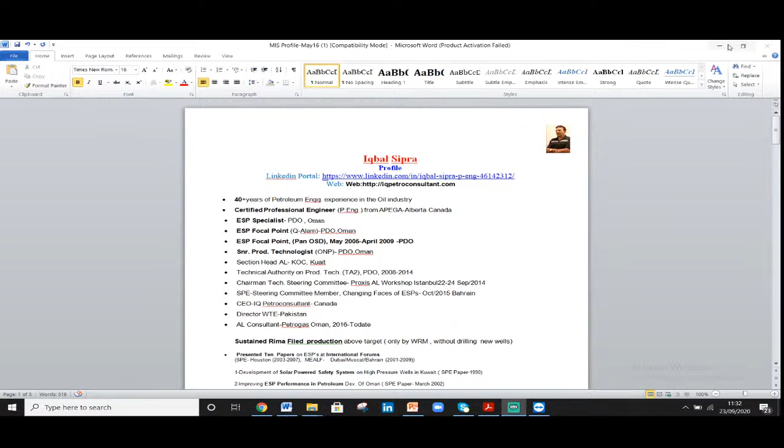Let's see what I'm going to talk about: artificial lift methods. Artificial lift basically means the means of flowing a well which is incapable of flowing by itself to the surface, by installing some pump or alternate devices. The concept is: if flowing bottom hole pressure is less than your static head pressure, the well will not flow. In this kind of situation, you may need artificial lift means to lift the well to surface.

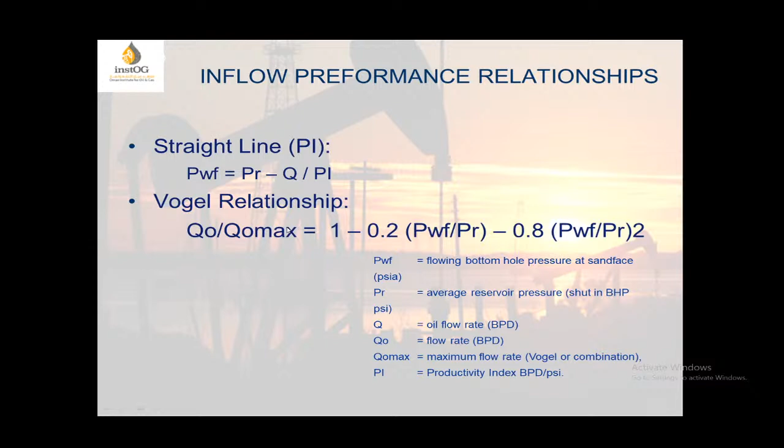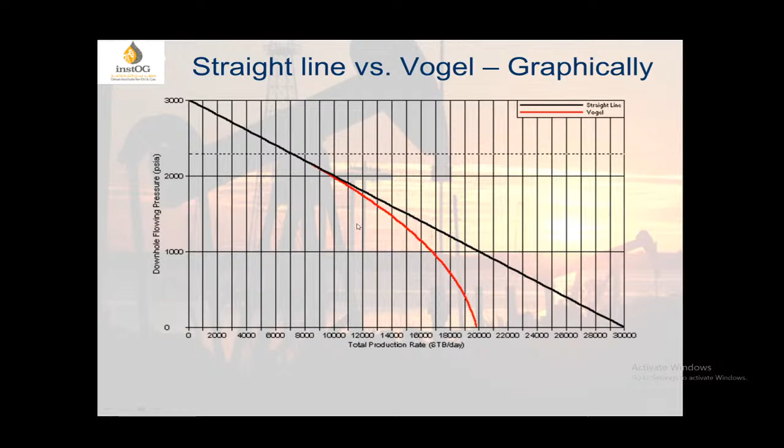So the concept is there are two ways: either the gas is in the solution or gas is broken out of the solution. If gas is in the solution, we still have a straight line correlation altogether. But in case it breaks out at the bubble point, then it deviates and departs from the straight line, so a different correlation applies. I don't want to go into mathematical details at this stage.

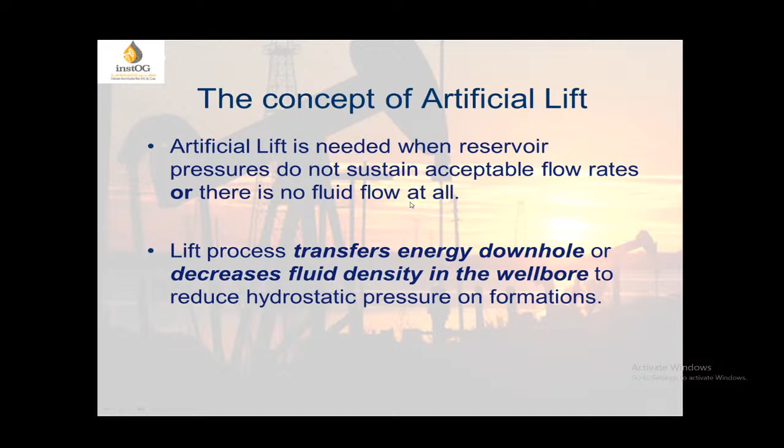Artificial lift is used when reservoir pressure does not sustain acceptable flow rates on the surface, or there's no fluid flow at all. The lift process transfers energy downhole or decreases fluid density in the wellbore to reduce the hydrostatic pressure on formations. So what are the artificial lift means commonly used in Oman also?

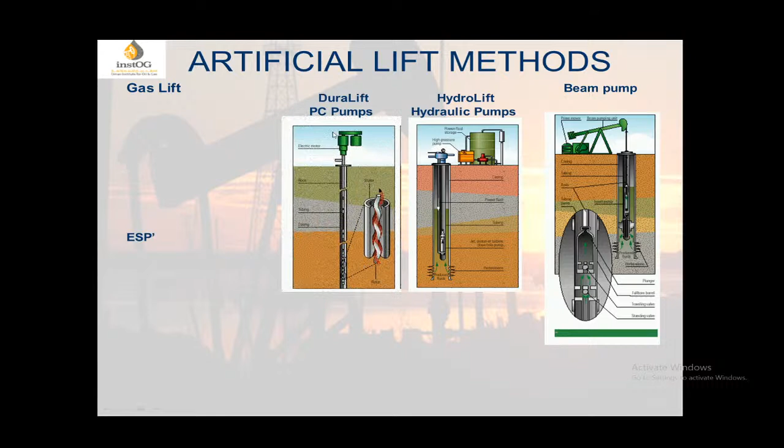First of all, the oldest method is the beam pump, then hydraulic pump, which is installed worldwide and also available in Oman, mostly in water wells. Beam pump is the most commonly used means of lifting in all areas, particularly in Oman. PCP is also installed and available in Oman. Gas lift goes to some areas also, and ESP is the most commonly used in Oman. I don't have exact figures, but the gut feeling is ESP produces 85% production worldwide, and it's almost the same percentage in Oman. Gas lift, PCP and hydraulic lift together are 15% of the rest of the application. The most numbers are beam pumps, but production-wise ESPs are commonly used for higher rates of production.

I should say about almost 1800 to 2000 ESPs are installed in Oman altogether, and PCPs range from 100 to 150. Gas lift is almost about 100 wells, and hydraulic pumps are very little, maybe 50 to 100, not commonly used in most areas.

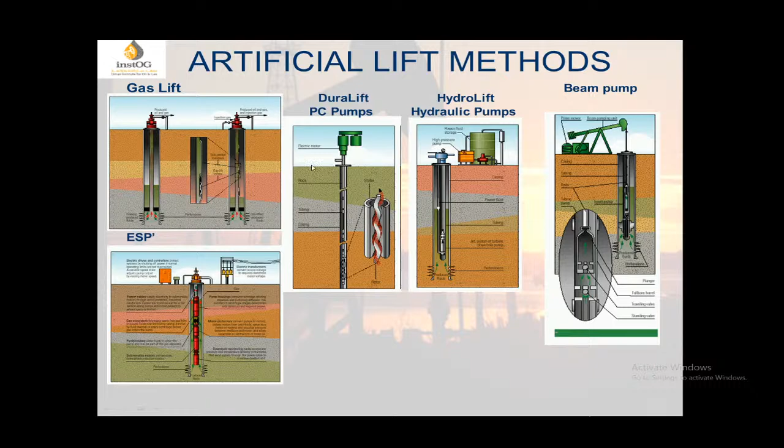Worldwide, 94% of wells are on artificial lift, and this is an old figure from 2004. You can see rod pumps are 79%, electric submersible pumps are 12% back in 2004. The figures have changed now, but I just want to give you a flavor and a picture. Gas lift is 3%, hydraulic pumping is 1%, and others 2%.

Production-wise and revenue-wise, rod pumps account for $717 million, and ESP is the most at $1725 million. PCP is $369 million, and hydraulic pumps are $30 million.

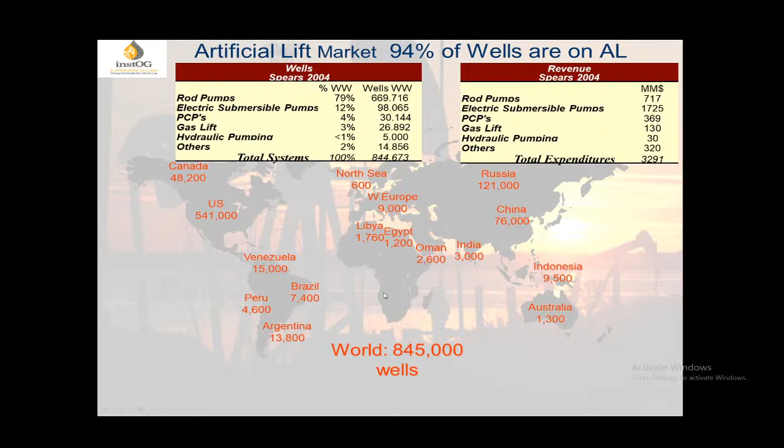You can see the most populations around the world: Canada 48,000, North Sea 600 - these figures are not applicable anymore, but just to give a flavor. Russia 121,000, 76,000 in China, Indonesia 9,500, 1,300 in Australia, 2,600 in Oman, maybe more and changing now. Libya, Venezuela, Peru, Brazil, Argentina also have significant numbers. The world total is 845,000 wells back in 2004. Now it's much more increased.

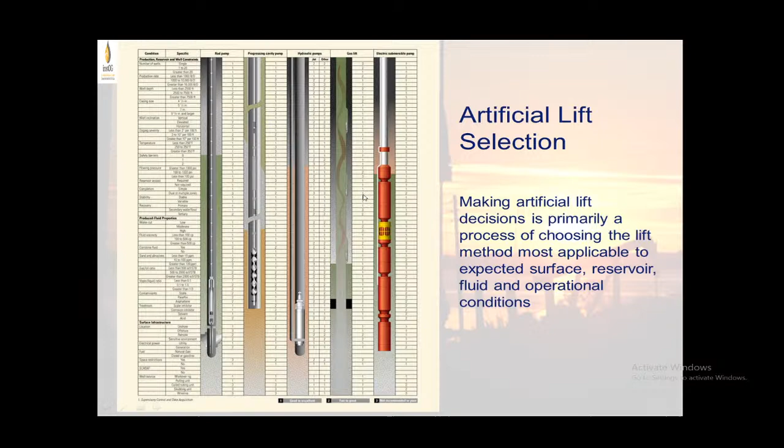These are the artificial lift selection methods. I don't want to go into detail on screen, but you can see there are different ways, installation depths, and ranges. So how do you select an artificial lift method? One size does not fit all.

If there's scale, gas lift is acceptable. If there's sand, gas lift is very good and hydraulic lift is very good. For paraffin, hydraulic lift is good, and ESP is good too. For corrosion, rod pump is best. For high GOR, gas lift is best, and ESP is fair to good. Nowadays high GOR ESPs are available - I've installed them myself, and in Oman I've gone up to 500 SCF per barrel.

Literally we can pump gas to the surface. For deviation, gas lift is very good, and ESP is good too. But for other wells, you should be constrained about vertical configuration.

Depth-wise, the best is hydraulic pump, then gas lift and ESP. Flexibility-wise, rod pump is more flexible, while gas lift and ESP are equally good. Temperature-wise, rod pump is the best, though ESP is also good nowadays - hotline ESPs can now be installed up to 200-250 degrees Centigrade.

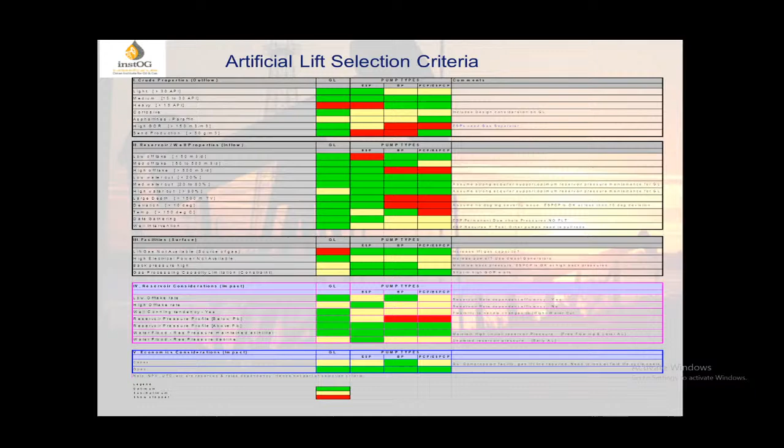They have been installed in the world. I have tried one in different areas of the world. So these are the artificial lift selection criteria in a nutshell. I don't want to go into detail, but this gives you a graphical picture.

Now we're coming back to the systems, one by one. I'm going to take you through all the systems one by one. Let's see what are the pros and cons of different concepts of artificial lifting.

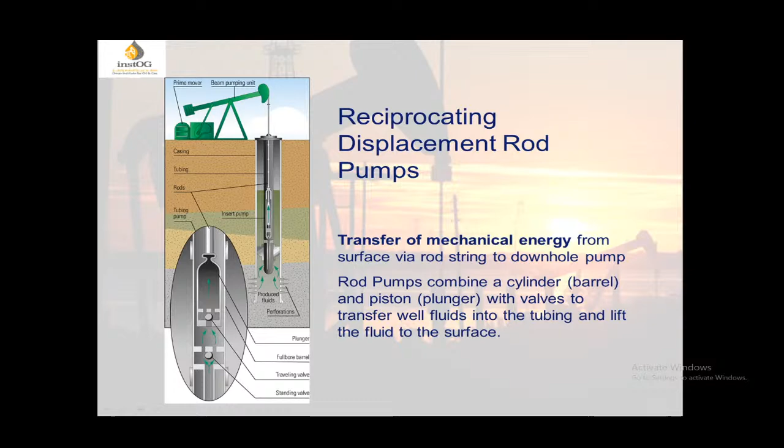Reciprocating displacement rod pump transfers mechanical energy from surface via rod string to downhole pumps. Rod pumps combine a cylinder and piston together, working on a to-and-fro motion. Advantages: most widely used artificial lift method, best understood by field personnel, low intervention cost, can be installed in remote locations without electricity, can run on gasoline or diesel, readily accommodates volume changes, and has reliable diagnostic tools.

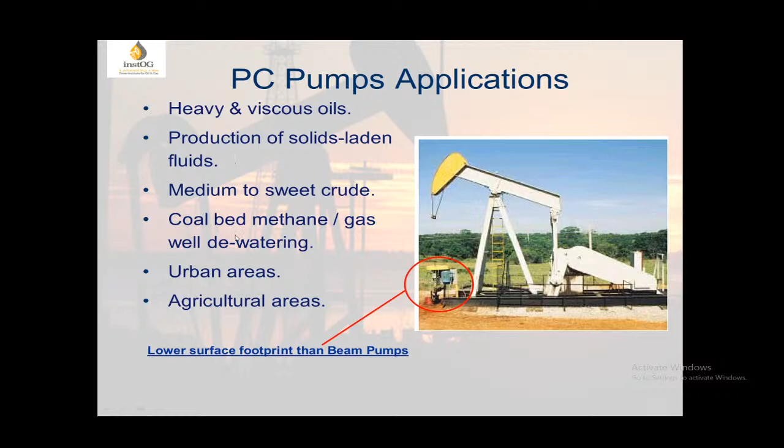So what are the applications? Heavy and viscous oils, production of solid-laden fluids, medium to sweet crude, coal bed methane / gas well de-watering - these can be installed in urban areas and agricultural areas.

Progressive cavity pump advantages: simple two-piece design, excellent for viscous crude, resistant to abrasives and solids, non-pulsating, does not gas lock or emulsify fluid, works on oil gravities from 5 to 42 degrees API, fairly flexible application method, and efficient power usage.

Disadvantages: sensitive to overpressure, sensitive to pump-off, restricted flow rates up to 5,000 barrels per day, with some exceptions but commonly around that figure, restricted setting depths, limited operating temperature, and not compatible with some chemicals.

Nowadays there are PC pumps available in the industry with metallic liners, and they can handle high temperatures.

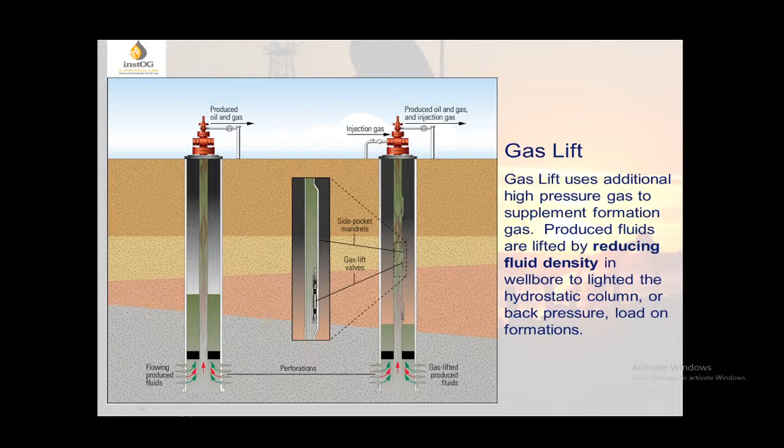Gas lift is the next application. It uses additional high pressure gas to supplement formation gas. Produced fluids are lifted by reducing fluid density, and by reducing fluid density, the flowing bottomhole pressure becomes greater than the static head pressure, causing flow to the surface.

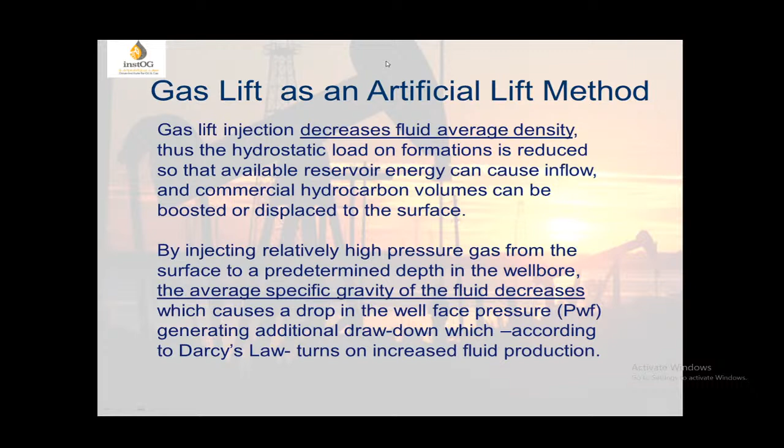Gas lift as an artificial lift method decreases the average fluid density, thus reducing the hydrostatic load on the formation. By injecting relatively high pressure gas from the surface to a predetermined depth in the wellbore, the average specific gravity of the fluid decreases, causing a drop in wellbore pressure. According to Darcy's law, this in turn increases fluid production.

This is another gas lift system configuration. You can see this is the tubing, with mandrels installed at different depths. Gas is injected from the surface through the annulus, and the fluid is produced through the tubing to the tank, where the gas is separated and then stored.

To clarify: gas is injected in the annulus all the way down, and the fluid is lifted in the tubing, going all the way to the gas separator. It separates the gas, and the fluid goes into the tank.

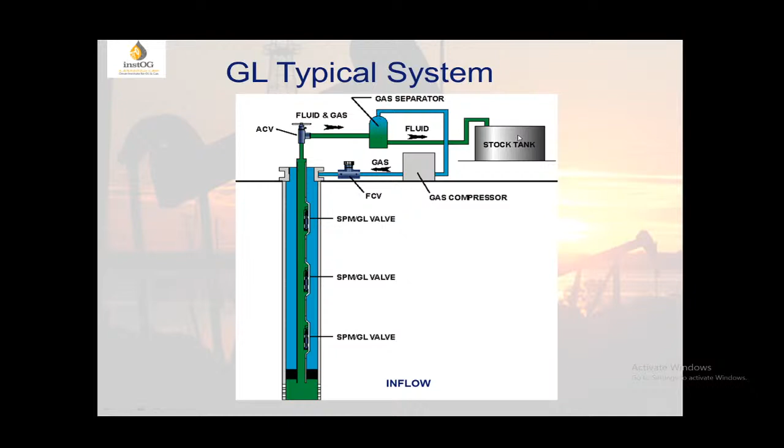These are gas lift system configurations. Advantages: fairly low operation cost, flexibility, can change rates by adjusting injection rates or pressure, and it's easy to change gas lift valves without pulling the tubing.

It's a high volume lift method, typically 35,000 barrels per day, and very good for sand and deviated wells. Disadvantages: must have a source of gas, and if gas is corrosive it will require treatment.

Possible high installation cost - initial cost is very high, but in the longer run the cost is much lesser. However, I have run a comparison during my working career in early stages, and found that gas lift is more expensive than other lift methods. If you compare gas lift and ESPs, gas lift becomes comparable only after 8 years of running. This is a very generic concept and cannot really be specified precisely.

In a nutshell, we can compare gas lift if it's available - it's easily used, and if gas is available, it's less costly. People can be trained on it very efficiently, and it's most commonly used. But now the industry trend is switching over from gas lift to ESPs or even PCPs, because of the cost of gas itself and the maintenance cost, it's no longer economically feasible. This is the common understanding.

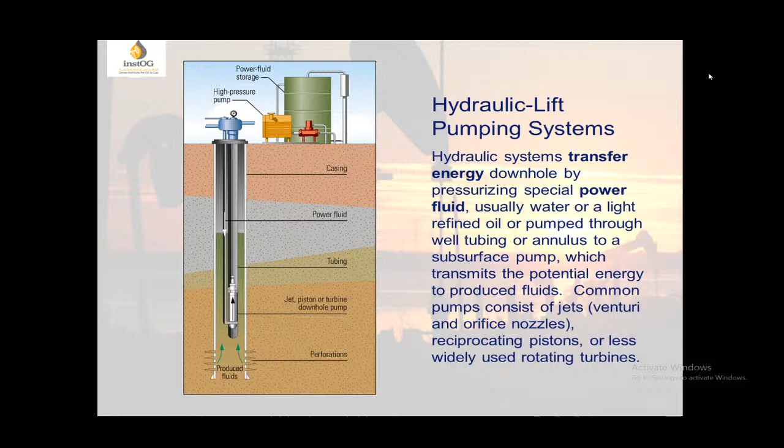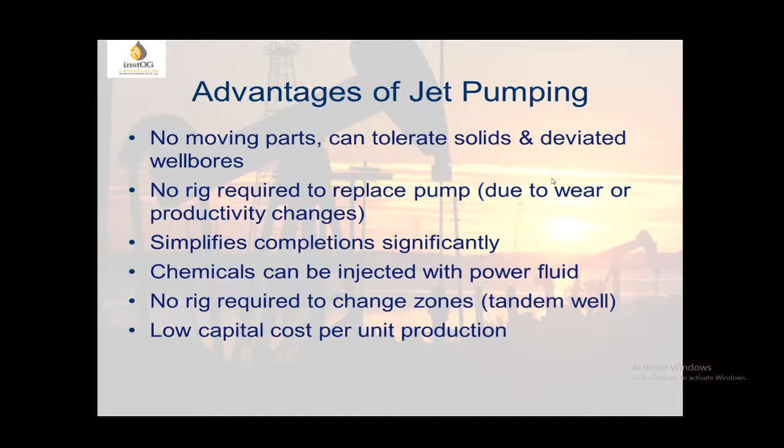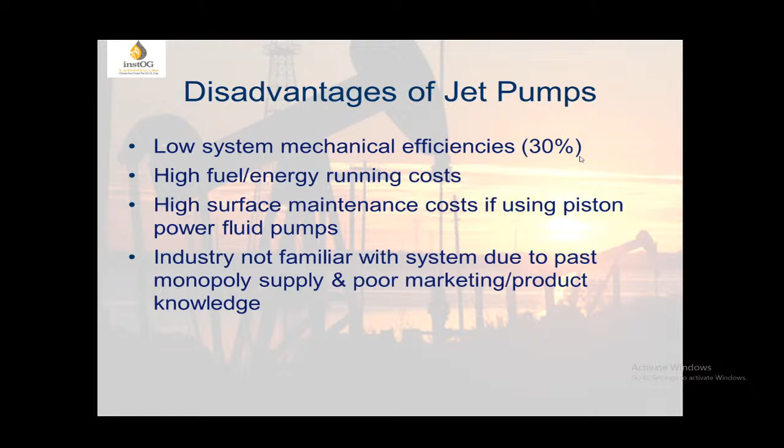Disadvantages of jet pumps: low system mechanical efficiencies, high fuel energy running costs, high surface maintenance costs, and the industry isn't familiar with the system due to past monopolies, supply issues, or poor marketing and product knowledge.

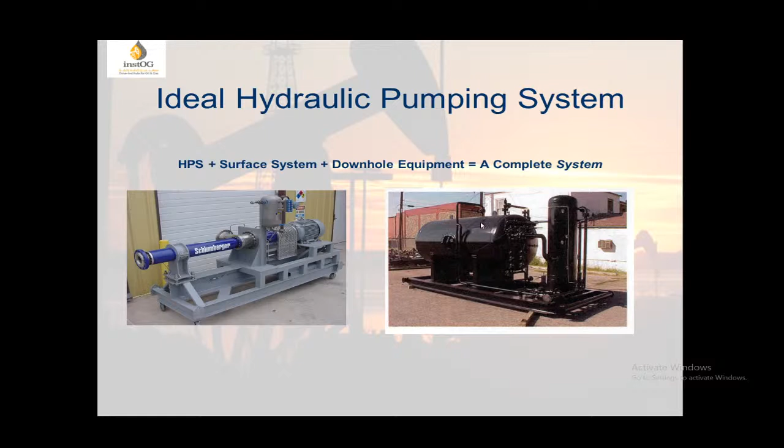Ideal hydraulic pumping system consists of this setup. You can see that HPS hydraulic pumping system, plus surface system, plus the downhole equipment, a complete system. This is your surface system, and this is separation system.

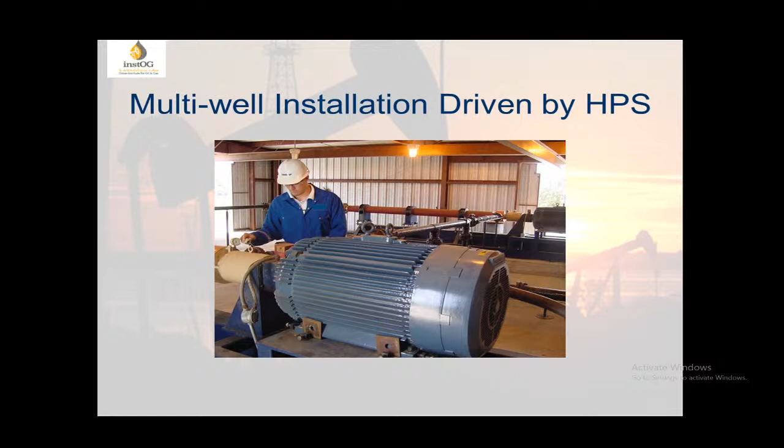A multi-well installation driven by hydraulic pumping system can also be done. You can see that this is connected to header and it can pump to multiple wells. And this is also portable testing units, available in the market.

Principle of operation: jet pumps can be used as an alternative to piston pumps. They can fit interchangeably into bottom assemblies, and a shorter bottom assembly can be used. Jet pump assemblies can be shorter and higher flow, referred to as a concept going back as far as 1852. First patents for oil well usage were in 1930.

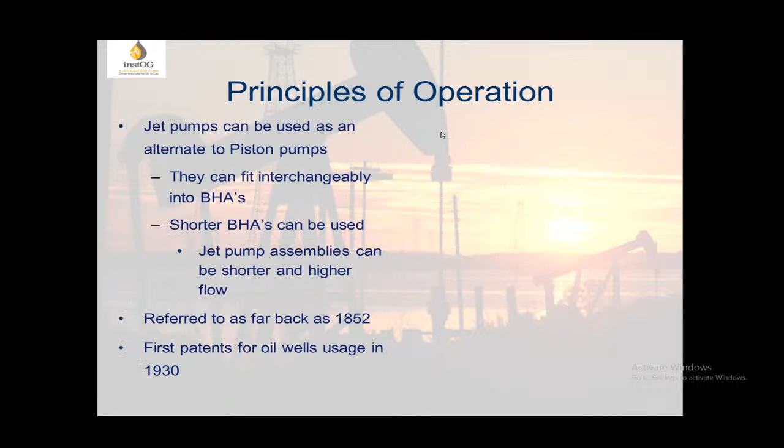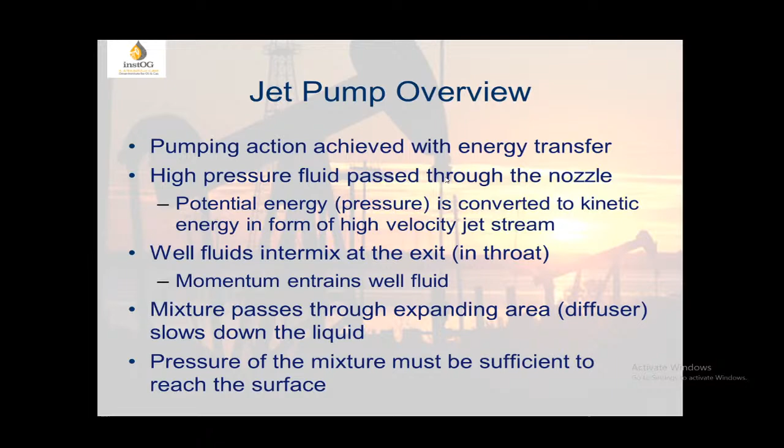Jet pump overview: pumping action is achieved with energy transfer. High pressure fluid passes through the nozzle, well fluid intermixes at the exit, and the mixture passes through the expanding area diffuser. Pressure of the mixture must be sufficient to reach the surface, so this is the concept of velocity head and pressure head together.

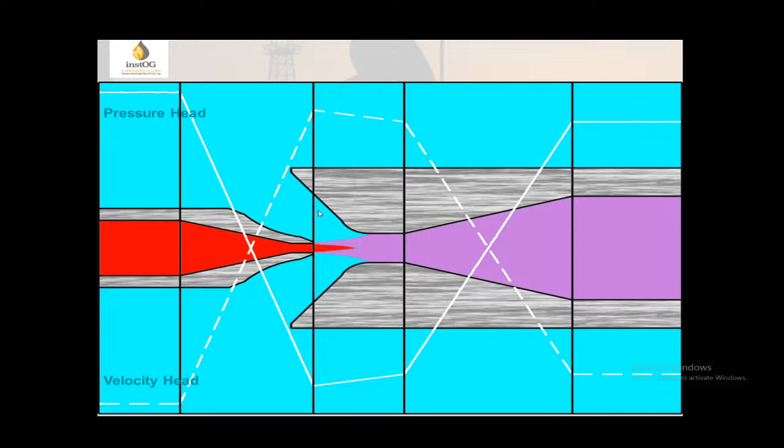You can see that it's a reciprocating system. When its pressure head increases, the velocity reduces. These are the nozzle and throat selection, you can see that picture.

No moving parts. Flow passages can use exotic materials or heavy oils, paraffin, gas, sand and corrosives. Reservoir needs a relatively stronger drive, with 100 psi per 1000 feet as the guideline.

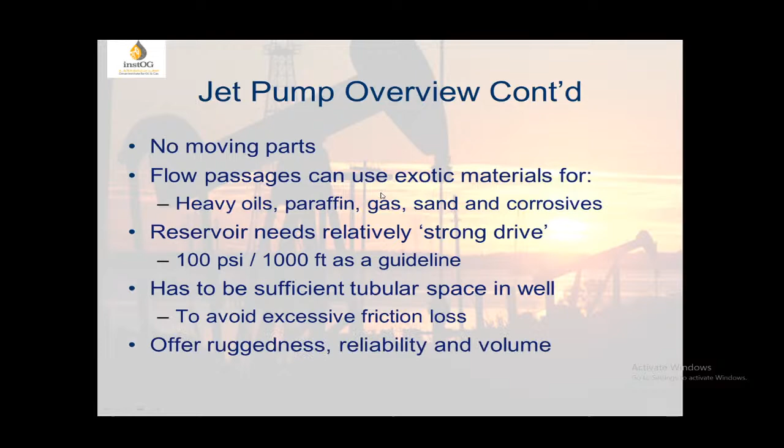And it offers ruggedness and reliability and volumes. Guidelines: PF pressure 2000 to 4000 psi, maximum well depth is 3000 to 12000 feet, production capacity is 15 to 10,000, and total length of jet pump section is 1.5 feet, very small.

Performance on nozzle throat area ranges from 20 to 60%. A different nozzle to throat combination provides a range of selection defining effectiveness of power fluid injection, power fluid to lift, and input horsepower. Higher lift, more pressure, more efficiency, up to 5,000 psi.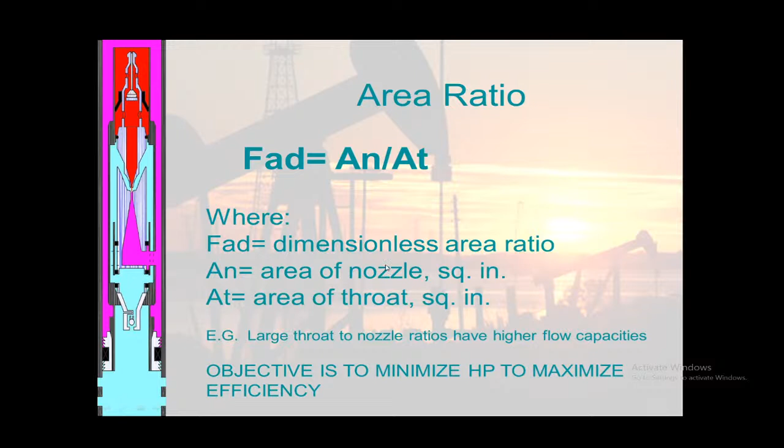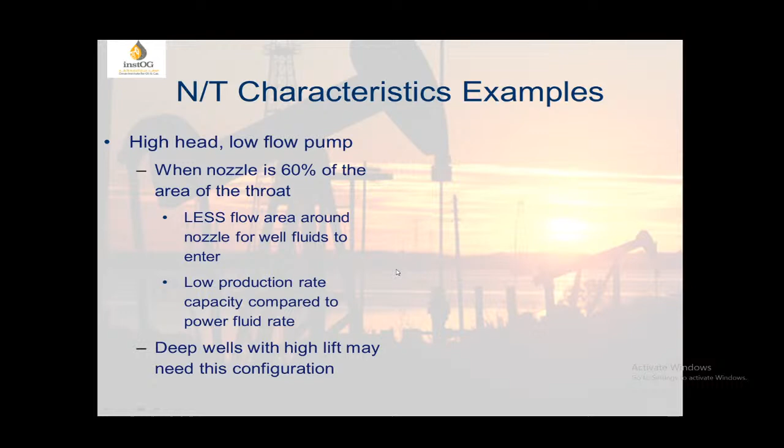High head, low flow pumps when nozzle is 60% of the area of the throat: less flow area around the nozzle, low production rate, and deep wells. Low head, high flow pumps is when nozzle is 20% of the area of the throat: more flow, high production rate, higher injection pressure.

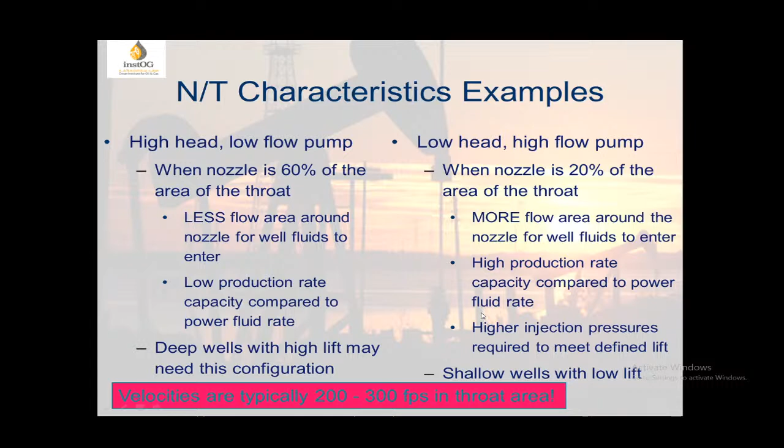And velocities are typically 200 to 300 feet per second in the throat area.

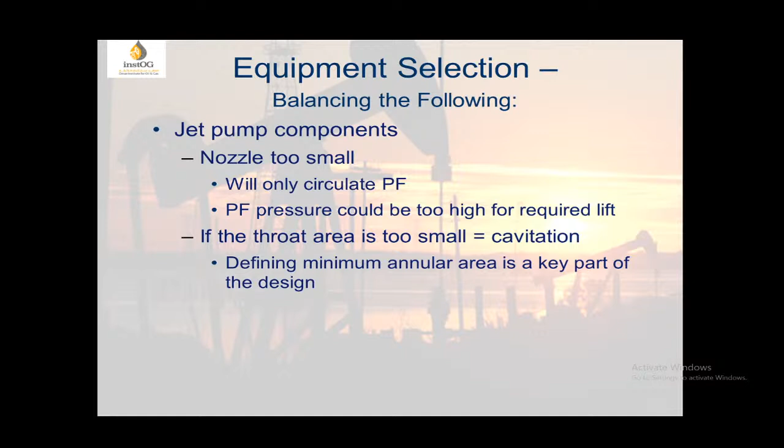Equipment selection balances the following: jet pump components with nozzle too small will only circulate power fluid. Power fluid pressure could be too high for required lift. If the throat area is too small, cavitation happens. Power fluid supplied goal is minimum high pressure and maximum production. Friction consideration is to keep losses to a minimum for applications.

So these are the concepts of application ranges. I don't want to go in detail, but you can see that 3.5 inches can go up to 15,000 feet and 10,000 barrels per day.

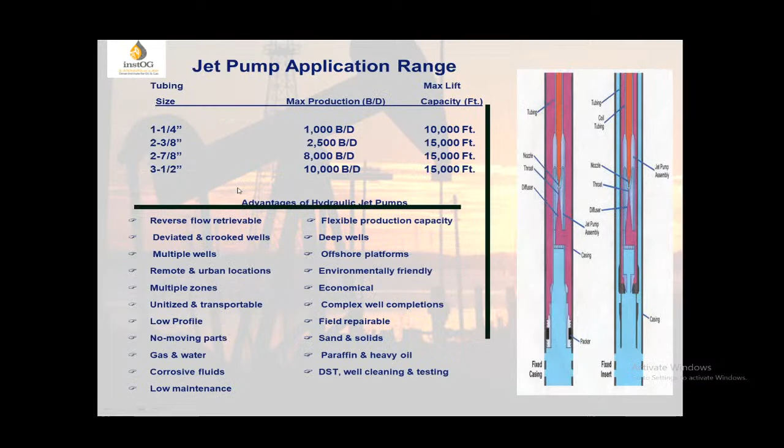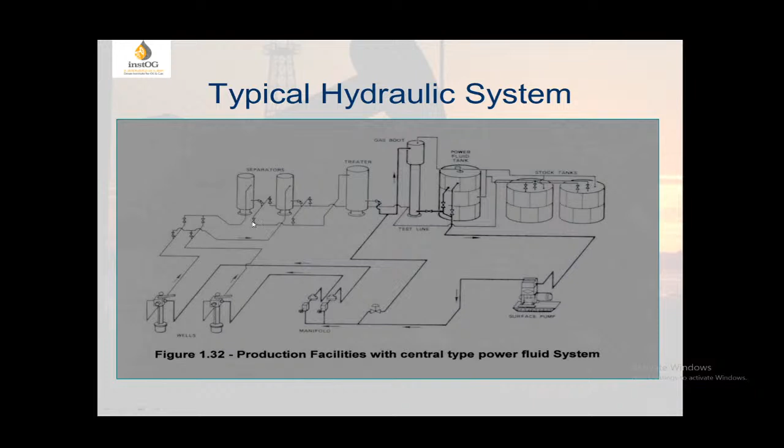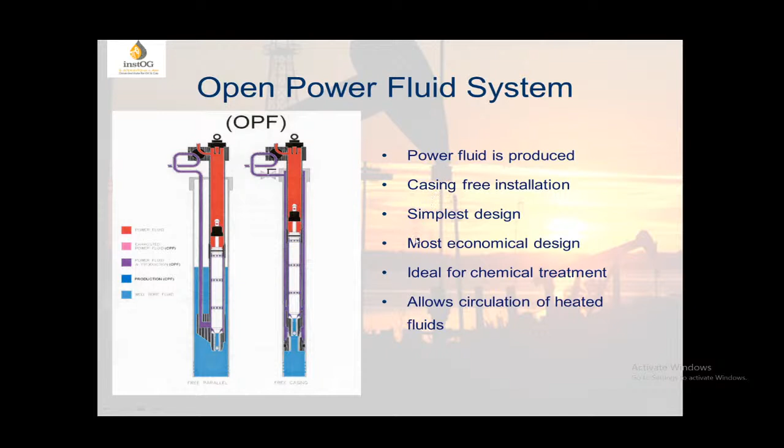So typical hydraulic pumping system, you can see that it's a big surface setup. Open power fluid system: power fluid is produced, casing free installation, simple design, most economical design, ideal for chemical treatment, allows circulation of heated fluids.

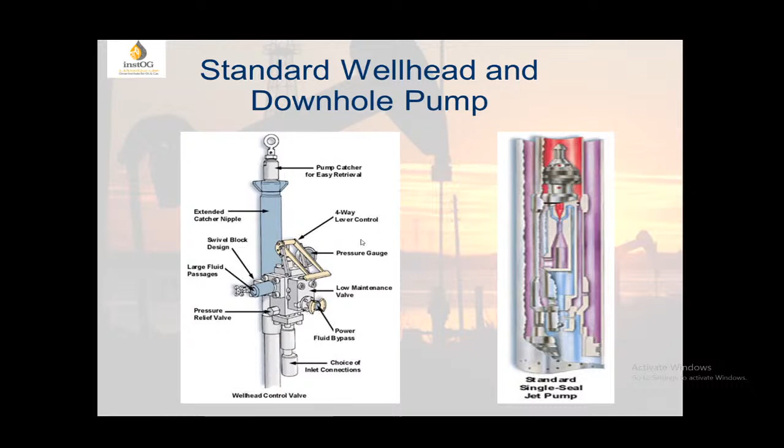You can see that surface installation and downhole system is a bit complicated. Now coming to ESPs, finally ESPs are the most commonly used. They're sold in Oman and also around the world. 85% of production is rendered by electric submersible pumps.

So electric submersible pump systems have multiple pump stages mounted in series within a housing, mated closely to a submersible electrical motor at the end of the tubing, and connected to surface controls by an armor-protected cable. It transfers electrical energy from the surface to downhole.

This is the combination of the electrical system. You can see there, this is a motor, protector, pump, gas separator, and the pump itself. All right, so we'll go one by one.

Electrical submersible pump system, ESP, transfers electrical energy from the surface to the downhole motor that converts it into mechanical power. This rotational movement turns the pump's impellers and lifts the well fluid to the surface. The ESP was introduced as a means of artificial lift by REDA in the late 1920s.

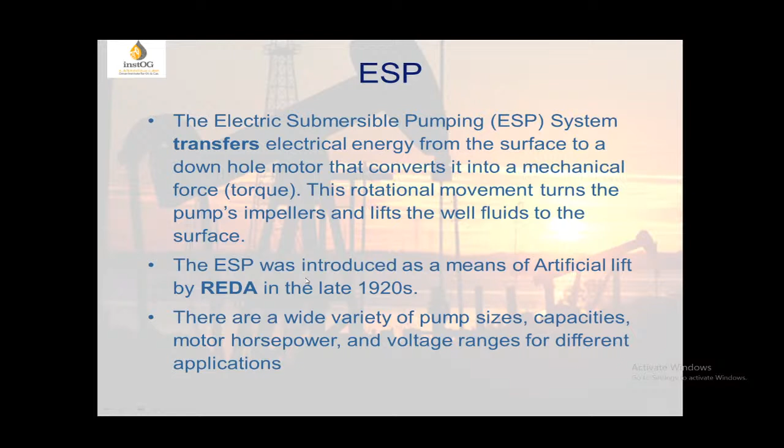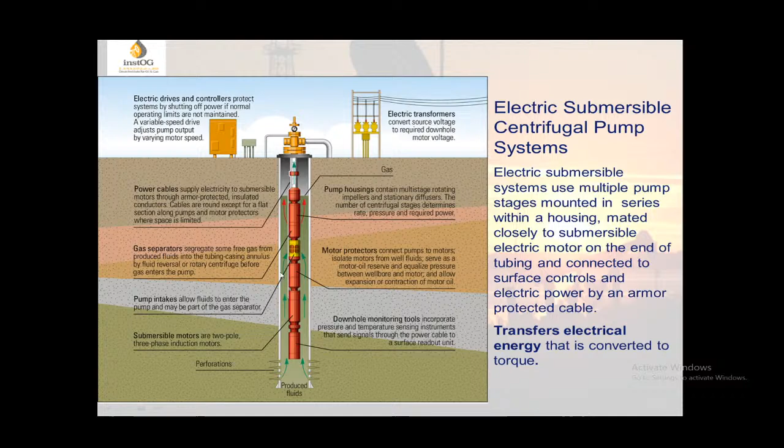ESP, I'll start from the bottom. From here: the motor, then the protector, gas separator, and the pump.

The ESP motor is a 3-phase squirrel cage, 2-pole induction design. It's the heart of the system since it provides the torque required by the downhole pump.

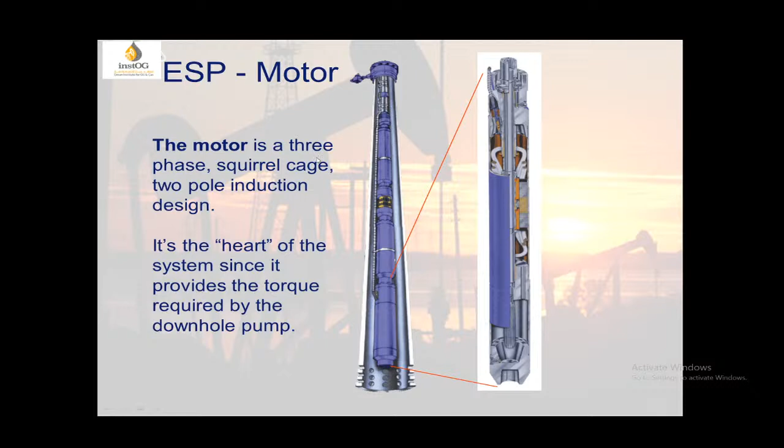Motor components are the stator and the rotor. The stator is composed of the housing material for a desired diameter, the stator core, and the stator winding, which is copper wire. The housing material forms the cover for the motor and is threaded at both ends for head and base components.

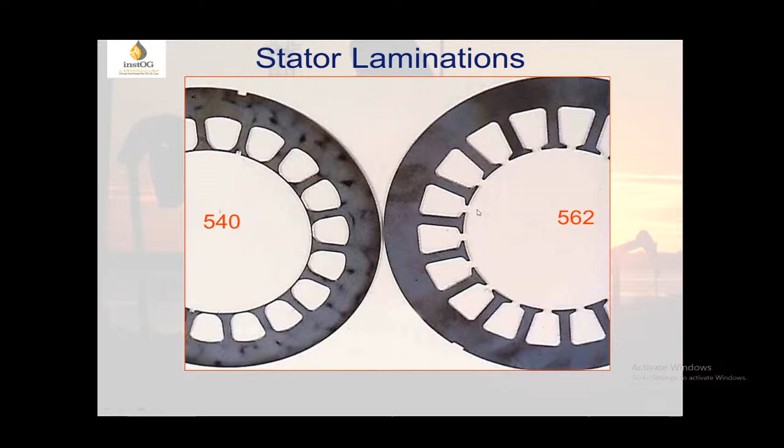Stator lamination - you can see there are different series, 540 and 562 series motors, depending on the well IDs and wellbore IDs. You can install relevant pumps and sizes. 540 is commonly used; 562 is larger - you can see the comparison in size.

The rotor is made up of a rotor lamination that is smaller in diameter than the stator lamination, and these create the iron core. Inside each slot are copper bars. You can see these copper bars and the iron core together, supporting copper end rings here.

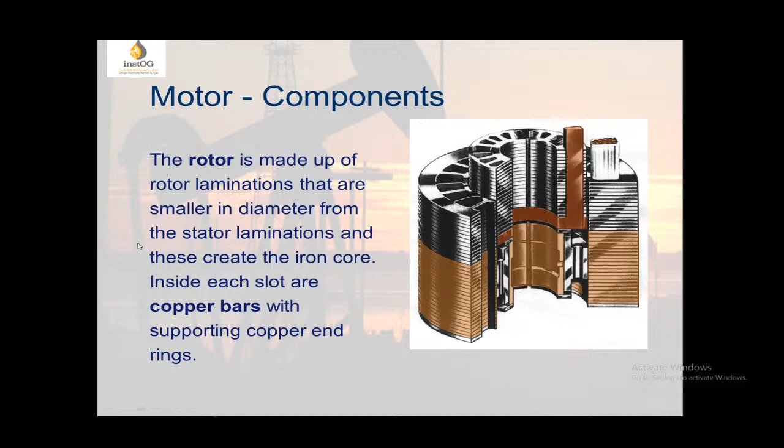These are the rotor lamination with the copper bars. You can see the copper bars and lamination of the 540 series.

These motors are available in a number of different sizes, voltages, and horsepower ranges, depending on the application. You can see the catalog - it tells you the motor voltages, sizes, amperages, and different series. It has to be selected from them.

There is software available which can select the motor and pump together for you, like SubPump and FlowSys.

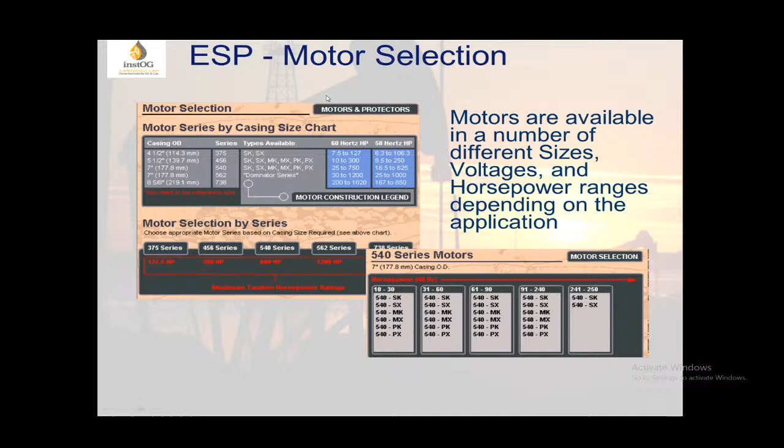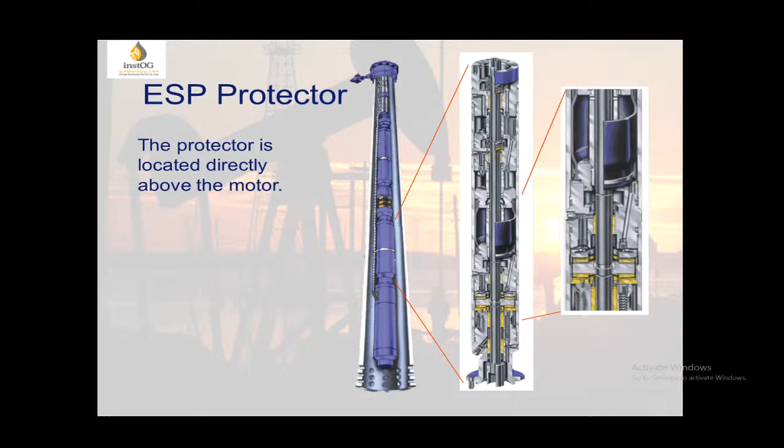The next system is the protector, which is installed on top of the motor. It separates the well fluid from the motor, and it protects and connects the motor to the pump. The protector is located directly above the motor.

The functions of the protector: it couples the torque developed in the motor to the pump, prevents the entry of fluid into the motor, provides pressure equalization, houses the bearing to carry the thrust developed by the pumps, and provides a reservoir for the thermal expansion of the motor. This is the shaft here - it takes the load also, and because of the temperature, the fluid the motor is filled with expands, so it accommodates the expansion of the fluid.

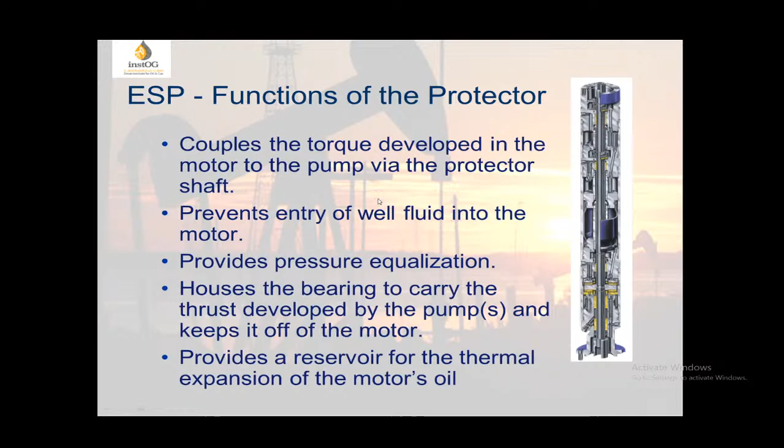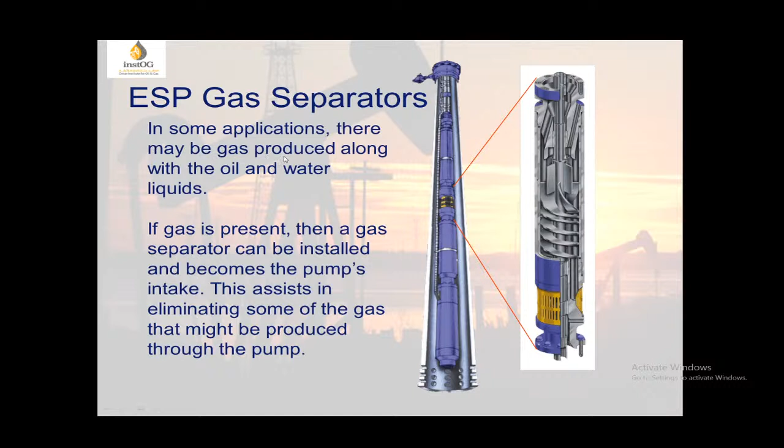The ESP gas separator - in some applications there may be gas produced along with the oil and water. You can install it on top of the motor to separate the gas and to supply fluid free of gas to the pump, because the pump is not meant to operate on gas.

It only works on fluid. So in some applications, there may be some gas produced along with the oil or water liquids. If gas is present, a gas separator can be installed and becomes the pump's intake. It assists in eliminating some of the gas that might be produced through the pump.

The ESP pump is the next component, installed on top, and this is the major component of the system. These are multi-stage centrifugal pumps, installed on top of each other. It consists of numerous impellers and diffusers, depending on the application, to provide the lift pressure required.

The pump has a discharge head that screws into the tubing. This is a discharge head here, and it screws into the tubing, installed right on top of the protector. The ESP pump, a centrifugal pump, is a machine that moves fluid by spinning it with a rotating impeller inside a stationary diffuser that has an axial inlet and a tangential outlet.

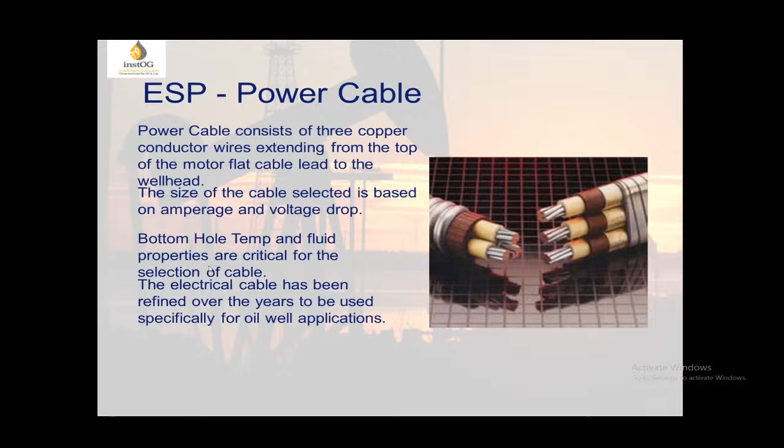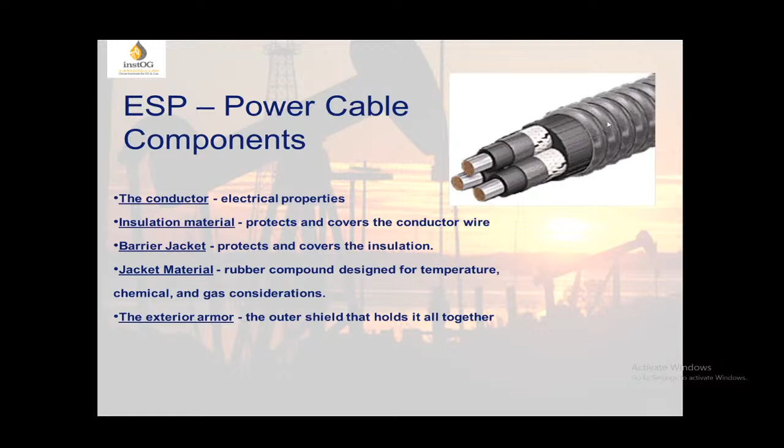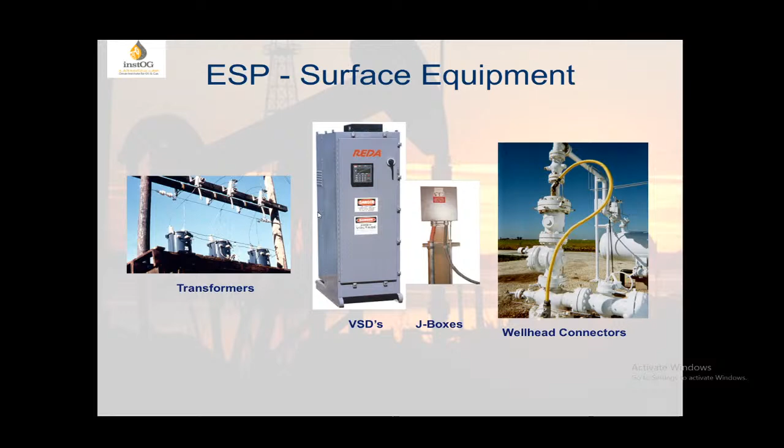Components are the conductor, insulation material, barrier jacket, jacket material itself, and then the exterior, which is called armor. This is all devices to protect it from the well fluid. So these are transformers, switchboard, junction box, and go to the wellhead.

So ESP surface equipment - the wellhead is a device that is installed on the surface on the wellbore casing. Its purpose is to support the tubing, string, cable, and the ESP connection, and handle high pressure conditions often present within the casing. Special wellheads are required for each and every combination. These are the wellheads required to penetrate the cable and the tubing together.

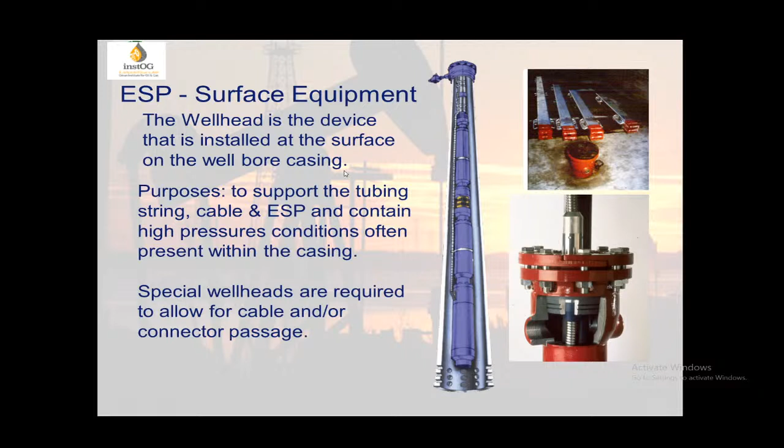Electrical transformers are required to deliver the correct voltage to the motor. A step down transformer, a step up transformer. Transformers can be either single phase or 3-phase, as I showed you.

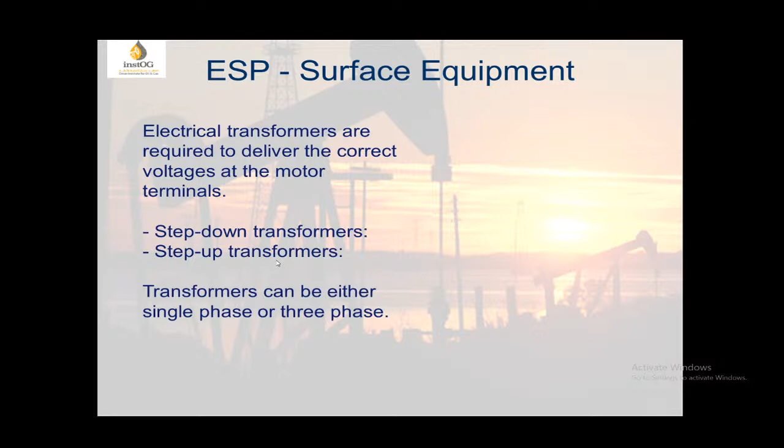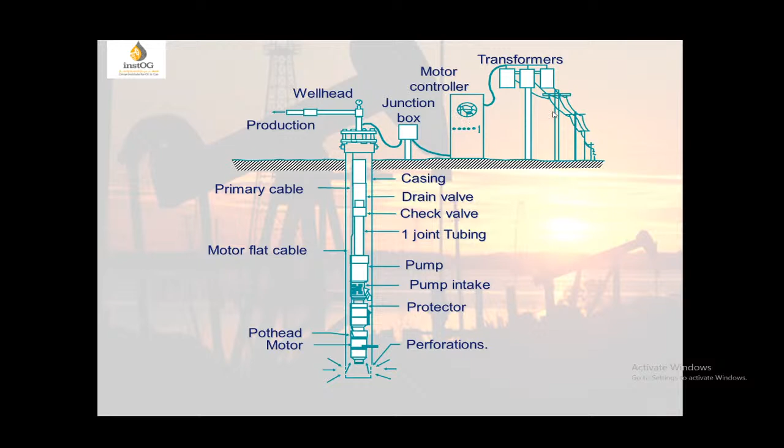The ESP junction box provides a connection point for the surface cable from the motor control panel to the power cable. But what happens is very strange. When you are installing the cable, mostly it's a new cable. With the passage of time, it deteriorates in integrity. The cable is prone to well fluid and temperature and pressures, and also all kinds of solvents. So we have to avoid gas entry into the cable.

Normally, when gas enters with the passage of time, it has to not flow to the system, so it is vented in the junction box. The junction box provides a connection point for the surface cable from the motor control panel to the power cable, and the wellbore. It allows for any gas to vent that has migrated through the power cable, and provides easy surface access to the point for electrically checking the downhole equipment.

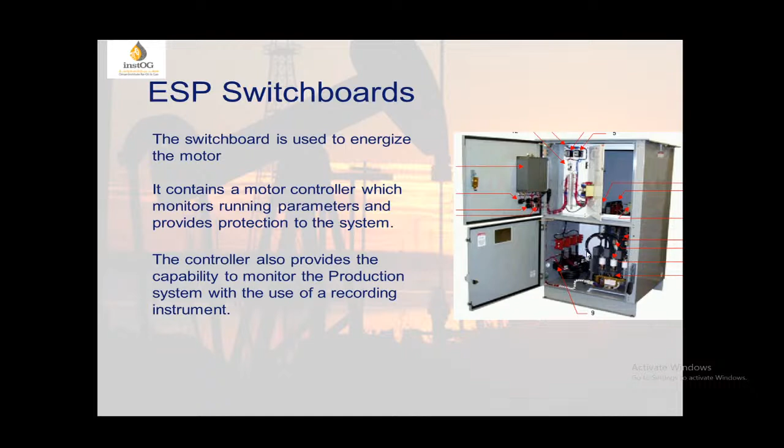VSD - as I mentioned earlier, for each and every company combination and installation, there are various sets of ESPs and motors with the relevant speed, voltages and amperages. Now in case it is a fixed speed motor with fixed speed production, you can see if you go back to the pump curve, with the passage of time and increase in velocity or speed, it can increase production also. But what to do if it's a fixed system?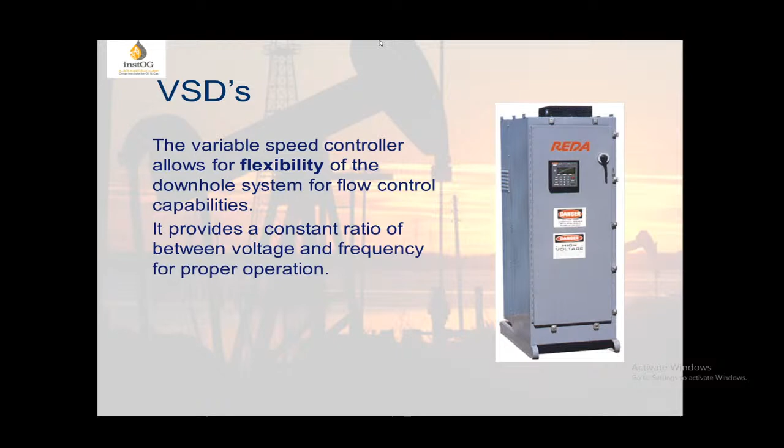Advantages: can achieve high production rates. When VSD operated, it can offer flexibility to accommodate changing conditions, PI, water cut, flowing pressure, reservoir pressure, etc.

Can be used at low bottom hole pressure. Can operate reliably in deviated and offshore wells. Can sometimes operate below perforations.

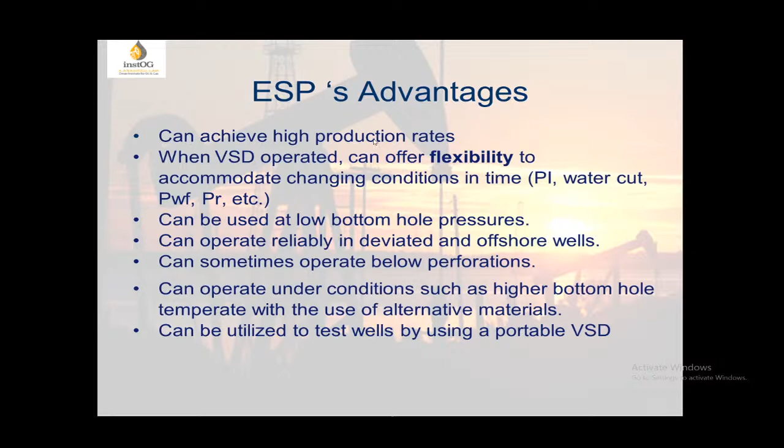Can operate under conditions such as higher bottom hole temperature, for which alternate materials are used. Can be utilized to test wells using a portable VSD, particularly in new areas for testing systems.

ESP disadvantages: a pulling unit is required to retrieve the failed ESP regardless of the failed component. Expensive intervention costs. High temperature affects cable and motor insulation. High dogleg severities are a problem.

Available electrical power for required horsepower is a concern. Use of switchboards at constant speed limits flexibility of production rates. Higher gas content can limit system capabilities. High solids may cause rapid wear and premature failures.

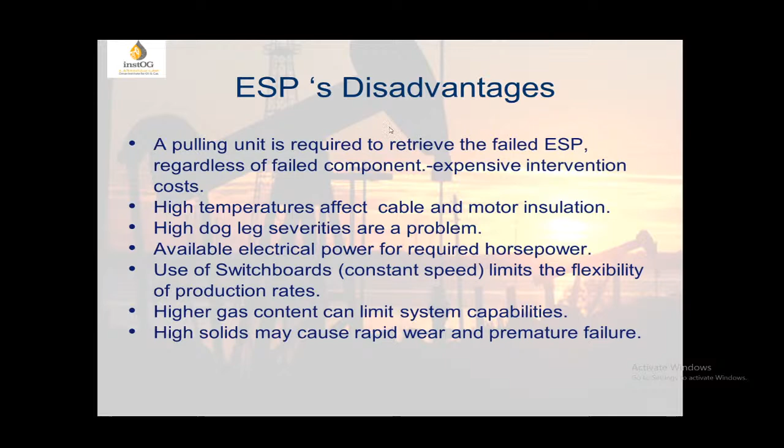ESP summary in a nutshell: electric submersible pump system uses multiple pump stages mounted in series within a housing, mated closely to a submersible electrical motor at the end of tubing, and connected to surface controls and electric power by cable. It has a wide performance range, can operate in deviated wells, and is the most efficient and economical lift method.

Tubing must be pulled to change or repair the system. Depth and gas oil ratio restrict capacity, and a large volume of gas can lock the system.

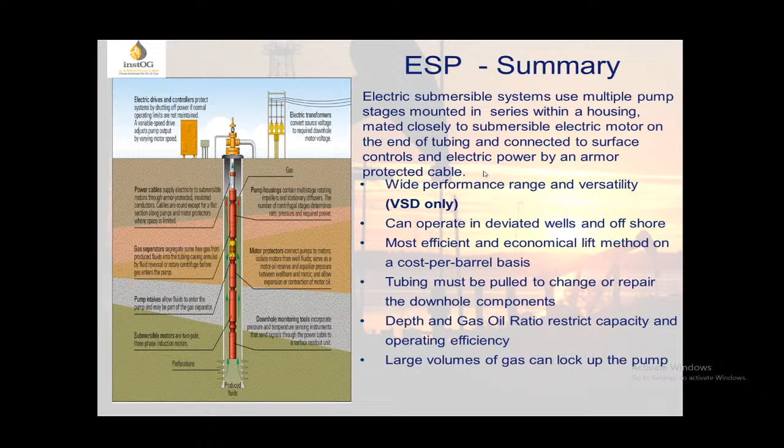That ends my presentation. Now I'm inviting questions. If there's any question, please send it to me and I can answer. We still have time.

Any questions, please? I can see from my chat board.

Any question please, on artificial lifting in Oman and worldwide?

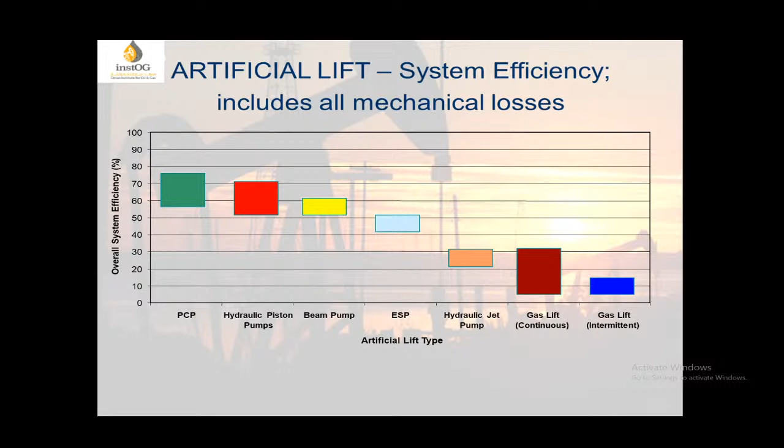But in some areas where downhole conditions are very high, up to 220 degrees, this lining is changed to a metallic one. It's a soft metal that can accommodate the cavity and the rotor also, without changing the profile. But it's a bit costlier system; the metals are a bit more expensive, and it's a typically different concept to use.

Any other question, please? We still have 10 minutes.

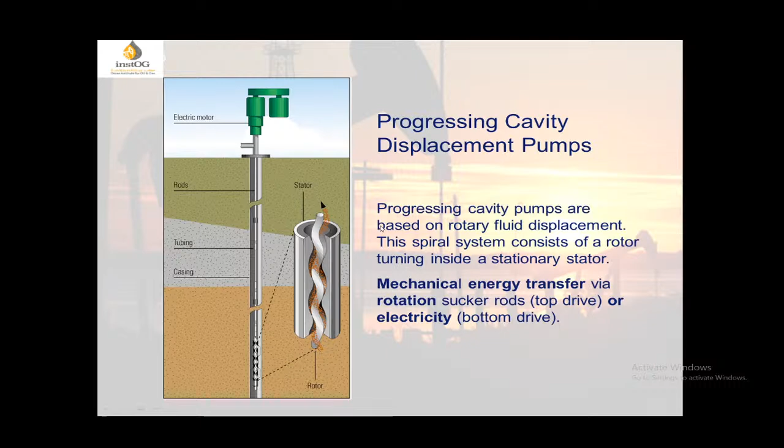But you cannot say that it's all applicable; it depends on the individual application, wellbore condition, corrosion environment, temperature, deviation, surface facilities, all together. Since I've shown you the criteria, you have to judge yourself which is the most feasible part for your area. You have to make a selection table for what fits best. And at the end of the day, economics actually prevail.

Cannot say really which one is the more feasible area. Yeah, this all depends on the wellbore conditions, surface facilities, and also the economics. These are the three deciding factors in selecting any artificial lift method.

So you cannot simply close your eyes, but the most feasible thing is you can really optimize the system as long as you wish. So optimization is always a key to your success. Even in your existing system, you can reduce the workovers, you can reduce, if you have got a proper knowledge of the system.

There are softwares available in the market which can design the ESPs and PCPs or any kind of lifting system. And then you should have proper training to train your people to run the system. But all depends actually once you installed it, you have to have proper knowledge to keep operating and keep the system within the envelope.

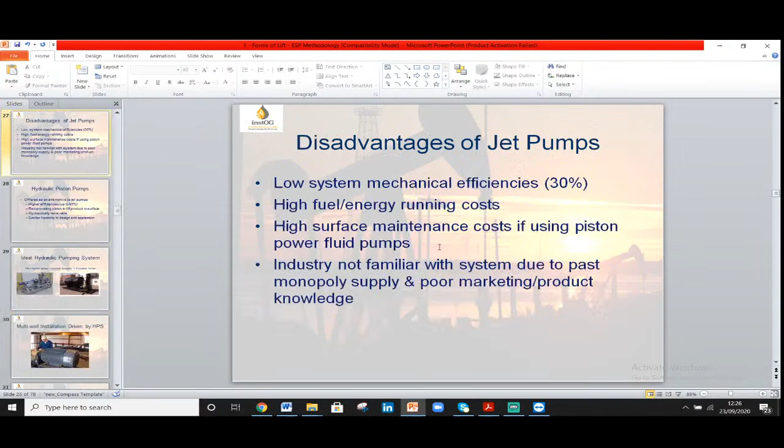Whatever pumping system you install, it should operate within the envelope. It should not be under thrust or over thrust, and it should not be pumping dry, it should run within the range. That's the key to your success.

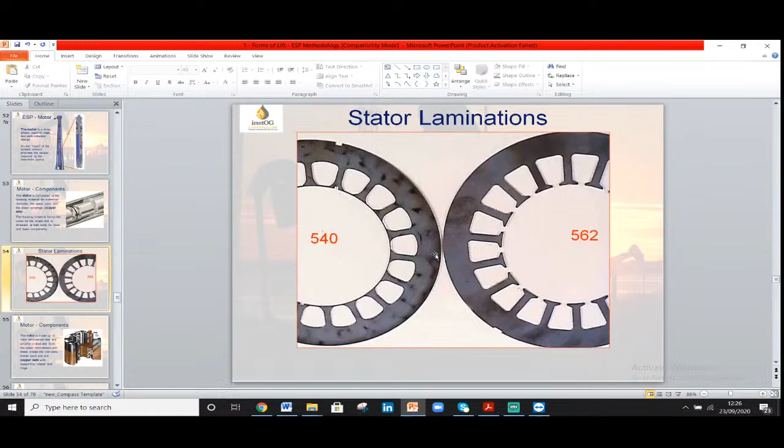As long as I have experience with areas which have installed ESP running for more than 10 years, but commonly we could obtain run life up to 3.5 years generally. And wherever the areas which we were newly establishing a trend, it went only for 6 months. Then we picked up the problem, we studied the system, and we found it can be optimized. So in the same areas, the same well which was running 6 months, is now running for 3.5 years. And sometimes, exceptional cases, it ran more than 10 years.

So there are ways to handle the system actually, because you have to take care of the system and its operation.

Any question, please? I'm ready to take any question.